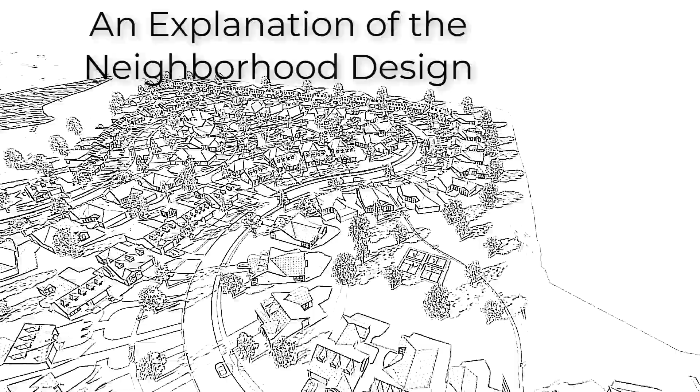Hi, I want to introduce myself. I'm Rick Harrison with Rick Harrison Site Design Studio. We're the planners of this beautiful new neighborhood in Gastonia.

A little bit about my background. I started land planning neighborhoods in 1968. Then I went off into land development and discovered the importance of engineering and surveying and moved to Texas, where I became a surveying engineering technician for about 4 years. I ended up as head of planning for Dallas's largest consulting firm, Herman Bloom Engineers, in the 1970s when I was 25 years old, and started developing software which Hewlett-Packard had caught wind of.

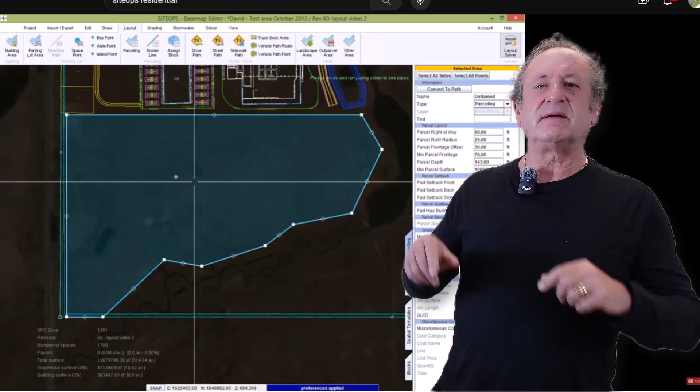This led to a 2-decade partnership with Hewlett-Packard where we developed and sold engineering and surveying systems to thousands of engineers around the world. By servicing the thousands of users over those times, we had our own aircraft and we were able to look at the patterns of development changing around the country as technology was being used, and saw it was obvious that the land development patterns had become more cookie cutter, because instead of sitting at a table with paper and pen and penciling out these things, all you had to do was press buttons on the computer and voila, you had a cookie cutter site plan in a fraction of the time.

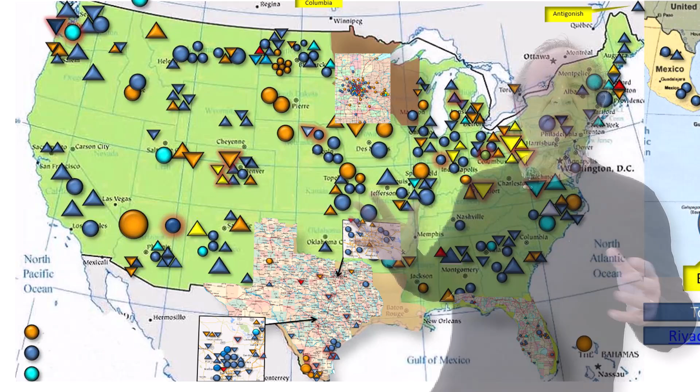Being that we were part of that problem, owning the software company, in the late 80s we formed Rick Harrison Site Design Studio as a research and development arm to use technology to discover new ways to develop land to create better neighborhoods and not just faster plats. Today we have designed over 1,700 neighborhoods in 48 states and 18 countries using the methods that you see on the site plan.

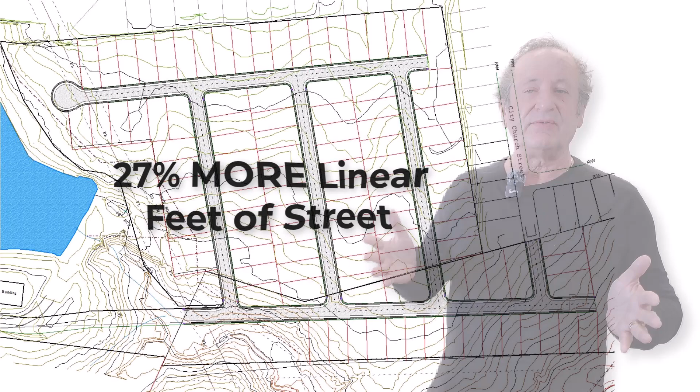This particular method we call coving, in which the homes undulate in and out, creating these coves of open space along the streetscape and eliminating the monotony that's so common to current developments, that every home is at the exact same setback, exact same side yards, the same rear yards. The difference is, in this method, we can actually reduce the length of street, typically around 25% on the developments we work on. This has a massive economic and environmental benefit for the growth of our nation.

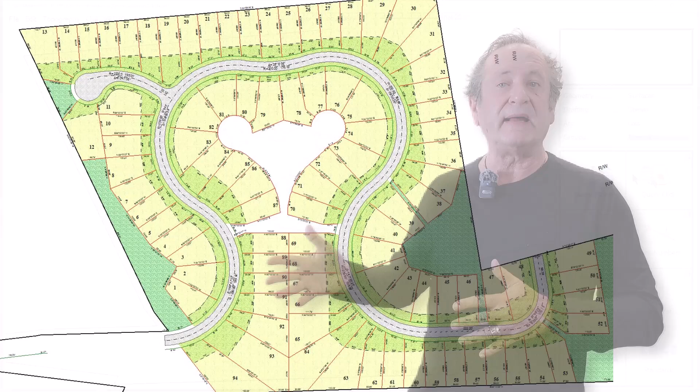So what happens when you have 25% on average less street length is now you have a lot more land for the people who live in the neighborhoods, and that's where we get this extra open space that goes into the lots, and why the average lot size is much greater than your typical minimum lot size per your ordinance, had this been a grid development with much more street length to get that density.

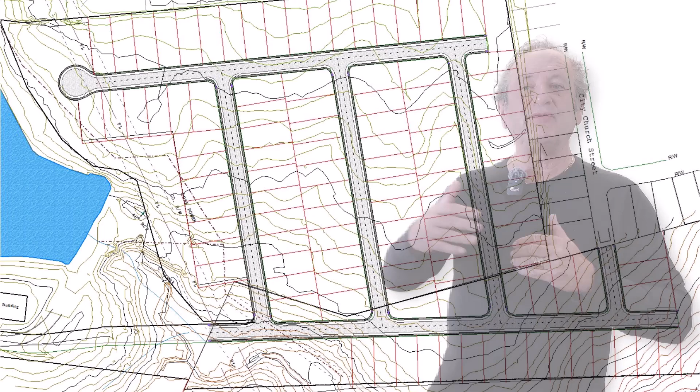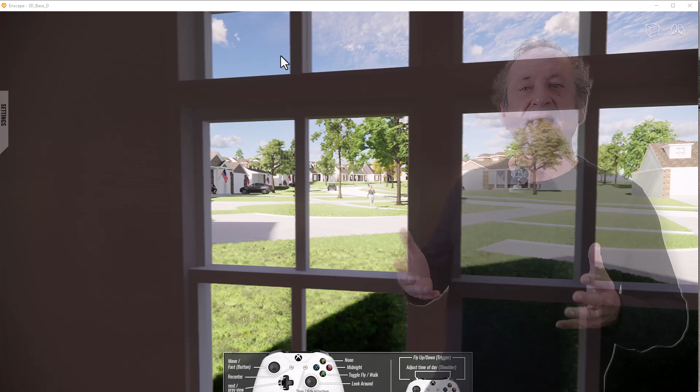So the average distance between homes, front, side, and rear yard, gets much greater than the typical gridded suburban neighborhood that would have been proposed before we got involved. The line of sight when you're inside the home and you look out the windows is much greater than a typical development where the homes are all lined up at the exact same setbacks.

The only key issue is the 250-foot radius to AASHTO standards. Now, of the 1,750 neighborhoods that we designed, the current typical radius of the roads that we're using is 200 feet. Now, I understand the AASHTO standard of 250 feet because we run into that every once in a while, and that would be about a 30-mile-an-hour speed, which you really don't want in a residential neighborhood.

In fact, I live in St. Louis Park. 3 years ago, our snow crew, as they were crossing the street, got hit by a car at 30 miles an hour. After a year, one of them recovered. The other will never recover from that accident. His life is destroyed. St. Louis Park, Minnesota now has a 20-mile-an-hour speed limit, and maybe their lives would have been much different had that speed limit been less. And around the nation, you're seeing a lot of cities adopt a 20 to 25 mile an hour residential speed. The 200-foot radius is naturally traffic calming.

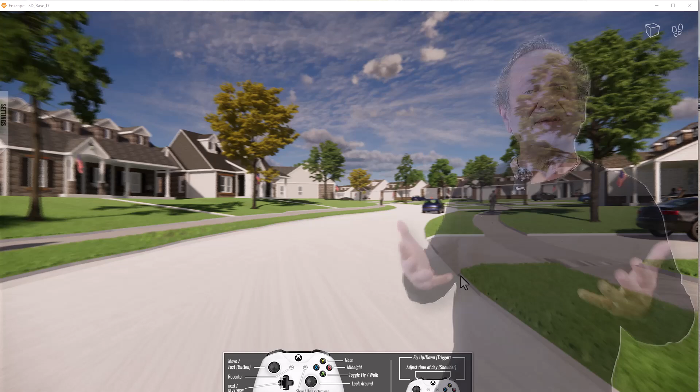So in these situations, we ask the city if we could propose a smaller speed limit. And invariably, every city we work in, if it's an issue, grants us that request.

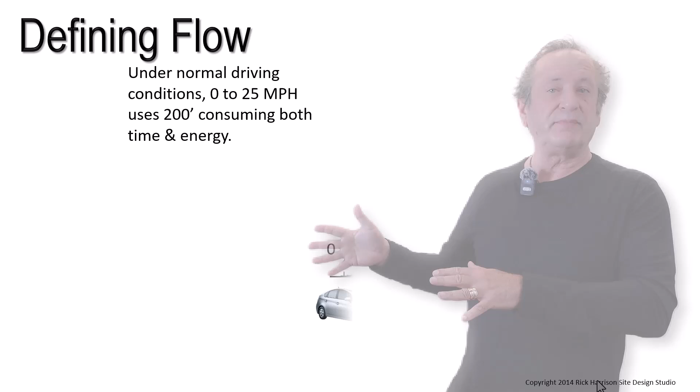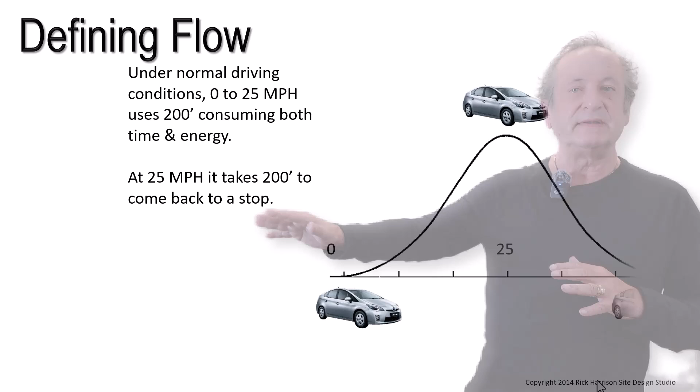I just want to talk a second about traffic flow and what is that? Cars don't go instantly to that 250-foot radius AASHTO 30-mile-an-hour speed. It takes about 200 feet and about this length of time to get up to the 25-mile-an-hour speed, and then it takes about the same amount of time, soccer mom driving, to get back to zero. That's what we call a flow cycle. That's approximately 400 feet. In that 400 feet, it's very inefficient for time and energy.

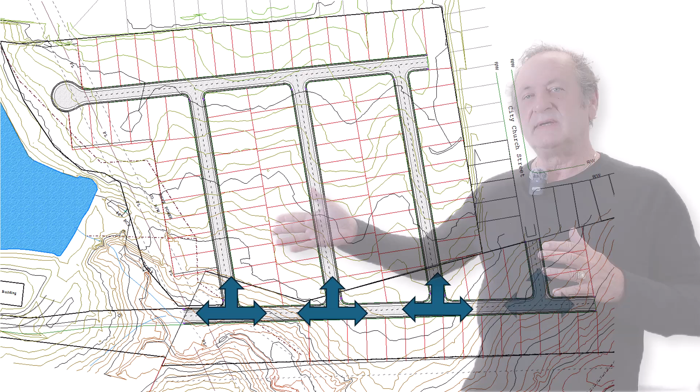As people drive through our neighborhood versus the proposal before, the drivers maintain a constant speed. So even at a lower speed limit, the average person is going to get to their home on average in less time than the plan before, where most homes would have to stop or near stop, make a 90-degree turn, go up the street, maybe get home, or another 90-degree turn to get home. So when we design these neighborhoods, we want to maintain a constant flow through the neighborhood.

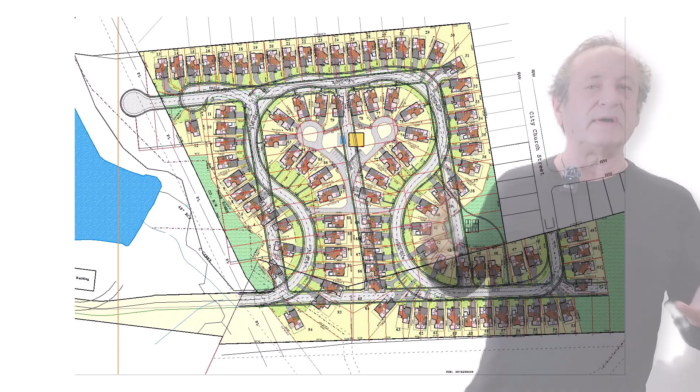And as you can see, the street pattern we're proposing is significantly less street length, not width, but length, than what would have been built, in a far more exciting neighborhood to live in, with more space for everybody to enjoy. So the property values increase, meaning the tax base increases, and the maintenance burden to the cities that we design in plummets, which is one of the reasons this new era design has been embraced by every city that we work in. I wanted to thank you for your time and hope this explains what we're really trying to accomplish with this neighborhood.